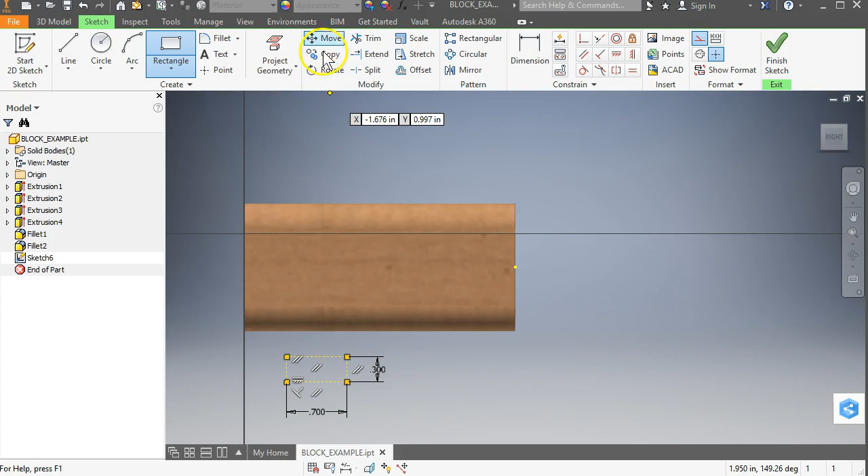That's my preference. So I'm just going to draw a 2-point rectangle out here hanging out in space, and I'm going to make it 0.3 tall and 0.7 wide, and that's going to be where I want to put my little hole. It is going to be attached to one of these corners. Now I need to go in and make some collinear constraints because I want this to be attached to the front of the block and I want this to touch the bottom of the block.

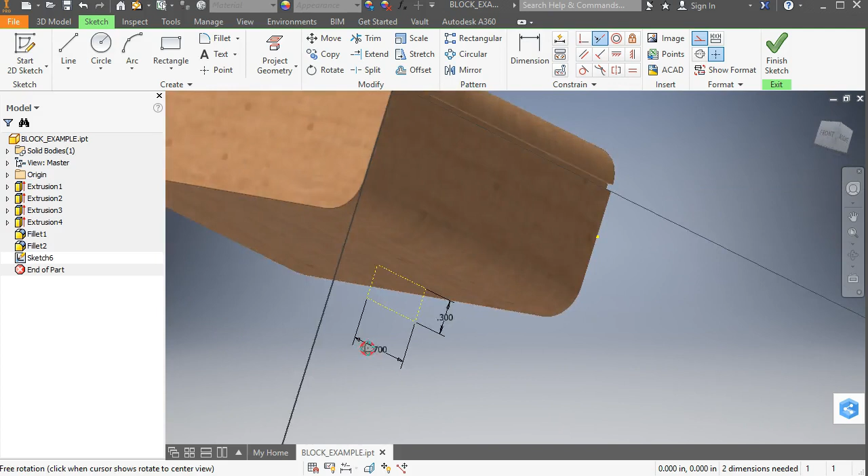So we're going to choose collinear constraint, this one, and I want to choose this edge. Let's zoom in a little bit so we can see what's happening. Too much. Nope. Okay, so that's not what I wanted. Let's go back to the right. So let's zoom in just a little bit. So I want to choose this line and this outermost line here. So those are collinear, and I want to choose the bottom and the bottom edge, and those are collinear. So what we've done is we've added a little sketch of a rectangle here.

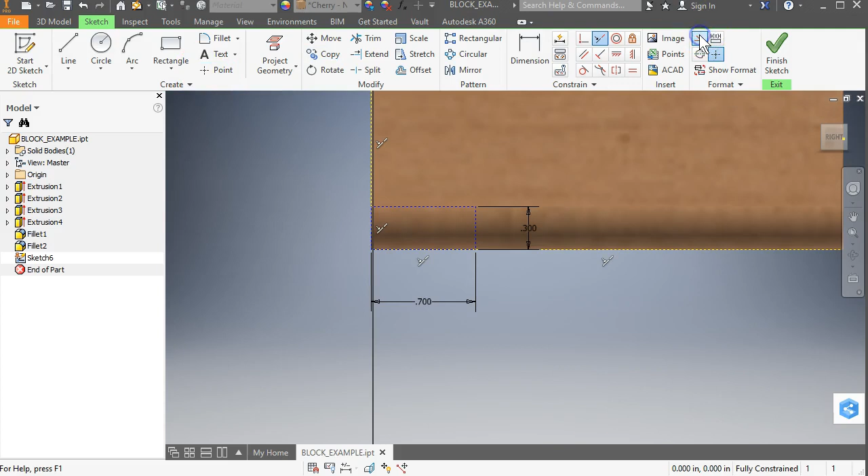So another thing I wanted to do, just to make my life easy, I'm going to turn off the construction line. I'm going to set a point right here at the corner of that little rectangle. Bam! Finish sketch. Now, if I immediately go and click hole, the last thing I had was that point, so it's going to connect it to that place where I just defined that point. So it says, okay, that's the last thing. You probably want a hole there.

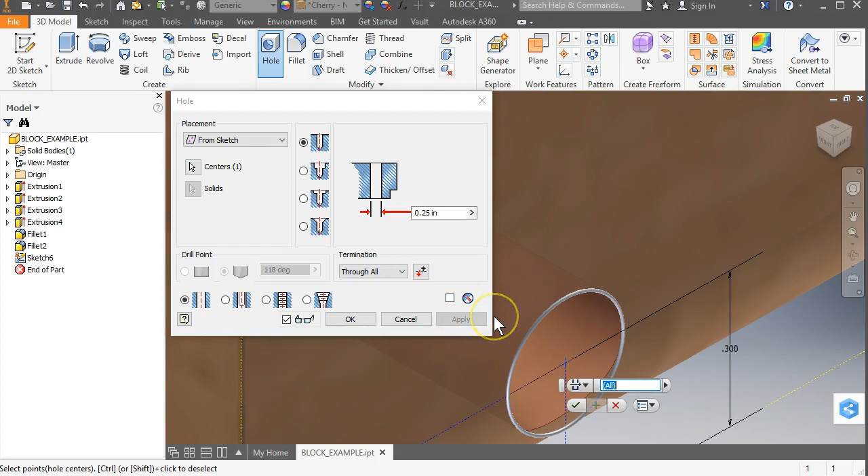Okay, yours is going to come up with through all, and what that's going to do is make a hole all the way through the body, and that's not what we want. So you can see it's actually punching all the way through. We're going to choose this little drop down and go distance. There's also another one, which is to, and what that will do is just drill a hole until it hits another face. And that's okay, but really in this one I specified a distance. So if you look at this, it tells you the depth in the first number, and the second number is the width of the hole. And if I recall, it's 0.3 deep, and it's going to be 0.29.

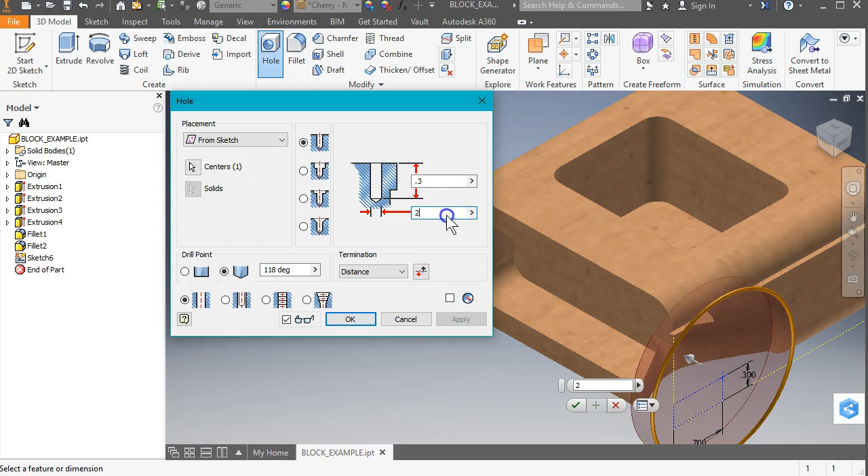I want to show you something as you do this. If you put 2 inches right there, it's going to show you a preview of what a 2-inch hole would look like there. And that's way too big. That's not what we want, but I thought that would be cool to show you. We want a 0.29 hole, and it's going to be 0.3 deep. And check my specifications on that.

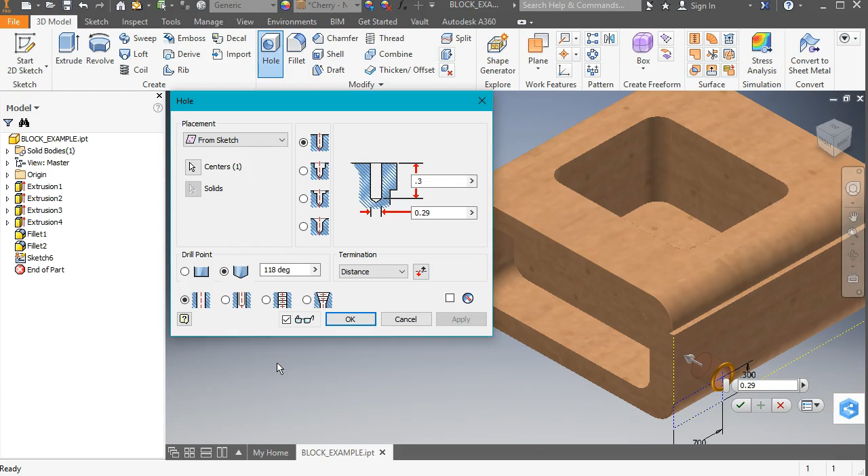Some other things you can notice about the different holes here: you can do a counter bore, which puts a little hole on top of the hole, and you can do one that's got a shallower one. I forgot what this is called. If you float over it, it usually will tell you. And then we have one that's got a countersink, spot face, counter bore, but in this one we just want a simple hole. Okay. Other things you can choose are threaded holes and tapped holes and that sort of thing. If you choose these the first time, it's going to take a really long time before it responds because it has to build a database in the background.

So for this project though, you just specify the depth and width, and then you choose OK. And now you can go to the right side and see that you have a hole. You can add more if you want. I just need one place for you to do an insert so that we can see how the pegs are going to fit into these holes.